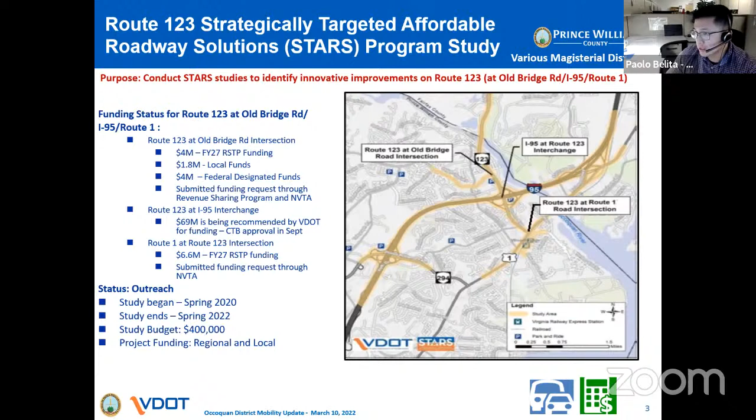With regards to the Old Bridge Road at 123 improvements, I know there are a lot of questions. The exact design will be determined as we go into the design phase, but conceptually, the improvements look at an overpass from northbound 123 to westbound Old Bridge Road. The exact improvements and impact will be determined during the design phase.

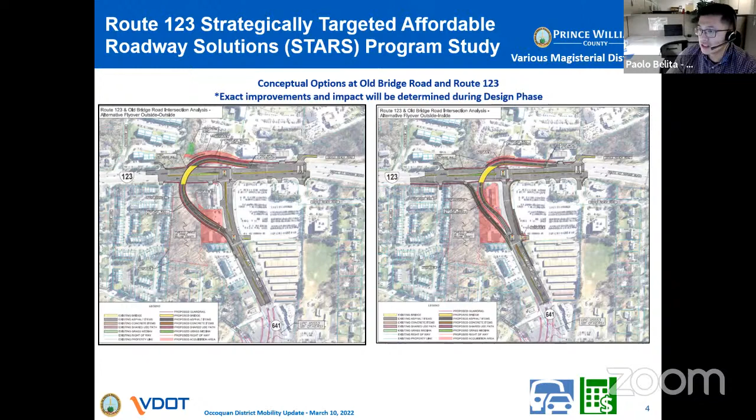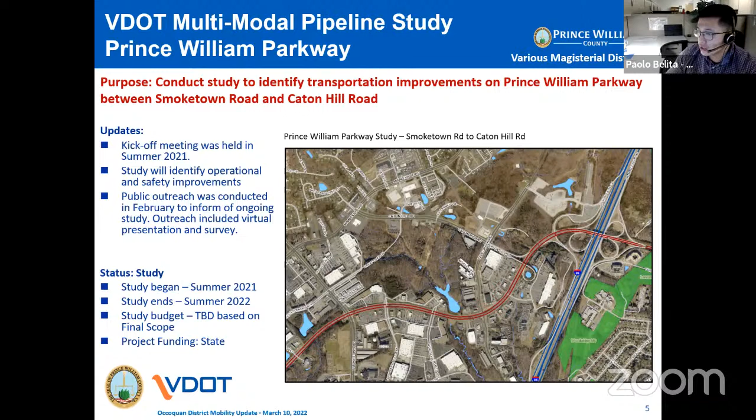Another study we're very excited about is VDOT's multimodal pipeline study. It's similar to SMART Scale, but looks at corridor-wide improvements. VDOT is doing a study on Prince William Parkway between Smoketown Road and Caton Hill Road, looking at intersection improvements and bike-ped safety improvements as well. This is ongoing, but ideally VDOT is looking for improvements that add additional turn lanes, crosswalks, innovative intersections such as through-cut intersections, and intersection improvements that really improve throughput along the corridor. This should be completed sometime this summer.

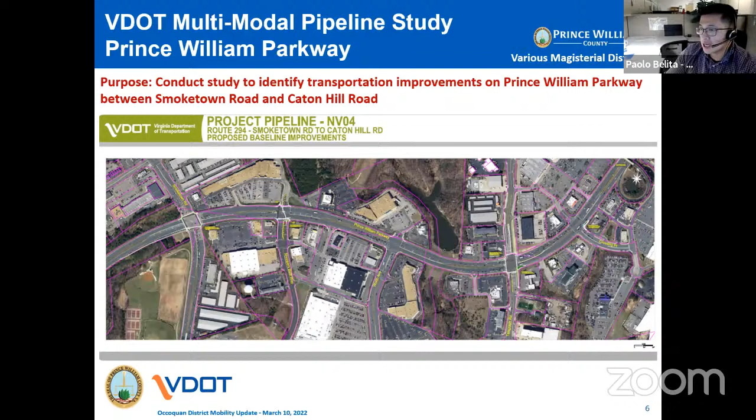Going into active projects, the first is the Old Bridge Road, Occoquan Road intersection improvements. This realigns the Old Bridge Road, Occoquan intersection itself. We had a joint in-person and virtual public hearing held last month at Occoquan Elementary School, with a good turnout - very exciting. Project design began in June 2020 and will be completed later this year. Construction is anticipated to begin in early '24 with completion in early '26. It is fully funded with VDOT SMART Scale funds.

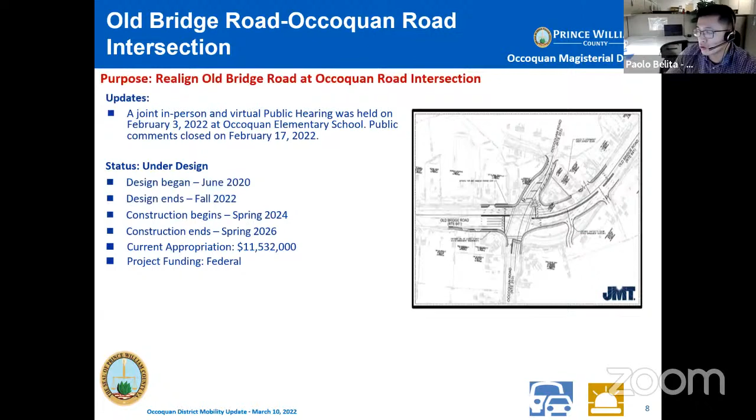As you can see with the schedule, a federal project does take a little bit longer - there are different requirements compared to a locally funded project. Here's a concept shared at last month's virtual information meeting, showing the realignment along with the bike-ped facilities and the intersection improvements itself.

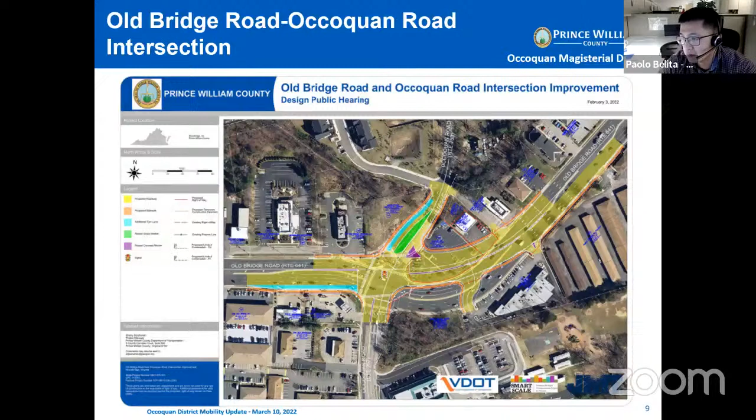Next project is the Summit School Road and Telegraph Road improvements. The project extends Summit School Road, where it currently terminates at Kinnicutt Drive, and ties it into Telegraph Road. It also includes widening Telegraph Road from Caton Hill Road to Prince William Parkway from 2 to 4 lanes. Project design began in 2019 and was completed last summer. We anticipate beginning construction late this year, with the project completed in early 2024. It shows $11 million on the screen, but NVTA has fully funded the project at a total of $35 million, so we're very excited to move forward.

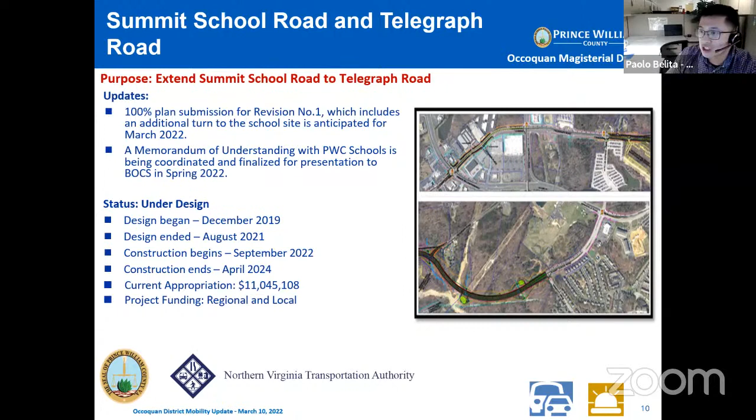Just another conceptual rendering of the project. It includes a trail on the east side, a sidewalk on the west side throughout the length of the project, and improvements to the future school at this location. We're continuing to work with our public school system on implementing improvements that will help circulation within their facilities as well.

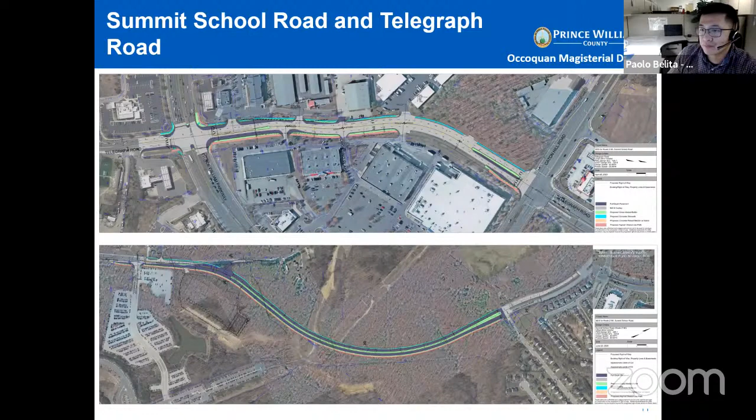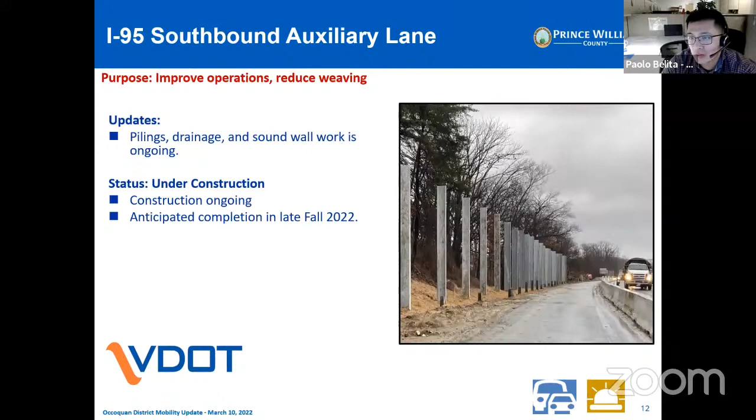Next project isn't a county project, but it is a very important project in the Occoquan District. This is VDOT's I-95 southbound auxiliary lane project. It extends the on-ramp from 123 onto southbound 95 to tie into the on-ramp from 95 to Prince William Parkway. There are a lot of weaving issues, and the intent is to minimize conflicts and improve throughput along this section of 95. This project is fully funded at approximately $28 million and will be completed by the end of the year.

One upcoming project we wanted to highlight is the Prince William Parkway at Old Bridge Road intersection improvements project. It realigns Prince William Parkway at Old Bridge Road to be continuous. The project was initially funded with Smart Scale for FY26 and 27, but working with VDOT we were able to accelerate the funds and plan to begin design sometime this year. This is a very exciting project. Currently, going from 95 towards Manassas on Prince William Parkway, you have a dual left turn, and going the other direction a single off-ramp to stay on the parkway. This project improves throughput by realigning the parkway as the major through corridor at this intersection.

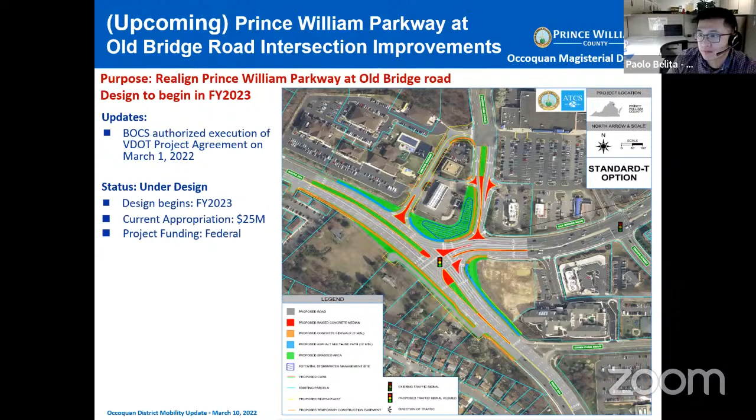Other improvement projects in the Occoquan District include two pedestrian improvement projects. One is on Old Bridge Road between Tackett's Mill and Minnieville Road, which is under construction and should be completed soon. Another is on Old Bridge Road between Oakwood and Forest Hills, a grant project currently under design, to be completed late this year or early 2023.

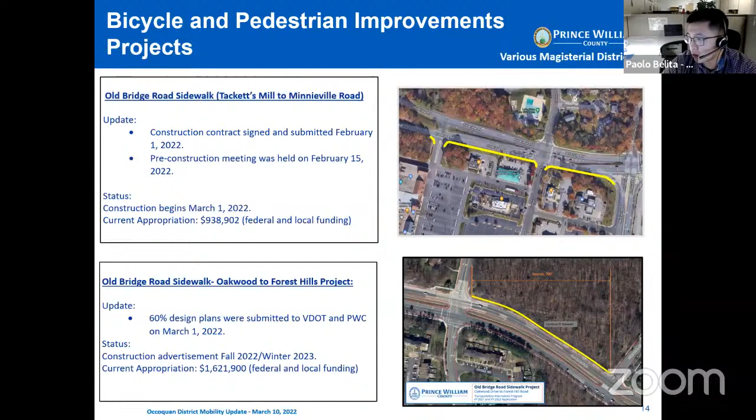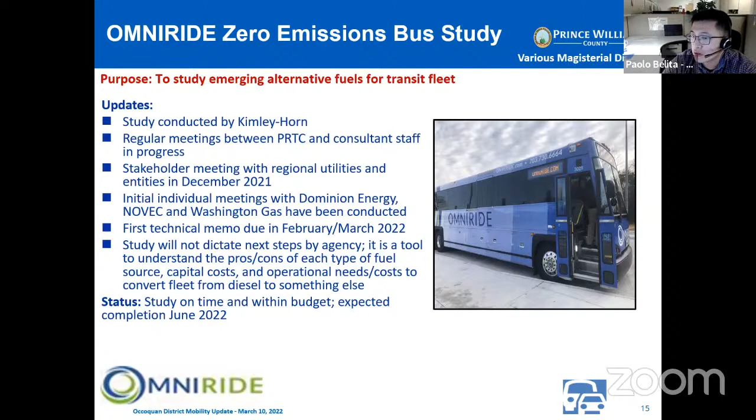Switching to some initiatives from OmniRide, PRTC, and our transit partners: they're conducting a zero emissions bus study to examine emerging technology related to alternative fuels for the transit fleet. The study is ongoing and will be completed this summer. It won't necessarily dictate next steps, but will look at the pros and cons of different fleet options, from diesel to newer technologies. This is very exciting and underway.

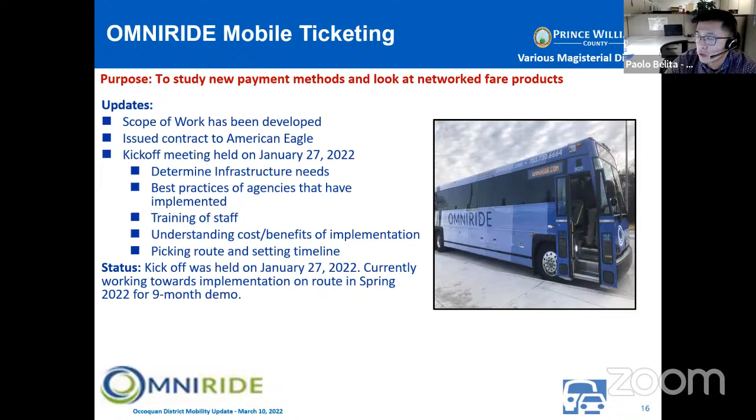OmniRide is also looking at a mobile ticketing study to explore new payment methods for their networked fare products, including best practices and staff training. The study is ongoing, and they plan to implement a 9-month demo starting this spring, looking at alternate ways to accept payments. This is another very exciting study.

In addition, OmniRide has various mobility councils to give a forum to the public and share information. They have the Vanpool Council, the Employer Council, and the Hispanic Council, all active and meeting over the past several months.

With that, I will turn to questions and hand it back over to Supervisor Boddye.

Rick Canizales, Director of Transportation: All the projects that Paolo described include pedestrian and bicycle facilities. So all the major road improvements discussed this evening, not just the standalone bike and pedestrian projects, but all the projects include both a pedestrian and multi-use trail as well as a sidewalk on the opposite side. I wanted to make everybody aware that as we're planning facilities nowadays, we continue to think comprehensively and want to make sure we're multimodal, going back to mobility rather than just transportation.

Thank you. Sure, absolutely. And if anyone has driven by Old Bridge and Minnieville, they're literally digging up right now along Tackett's Mill. I am assuming, Paolo and Rick, that's the project you were just talking about with the sidewalks. Correct, yes—underway and should be completed in the very near future.

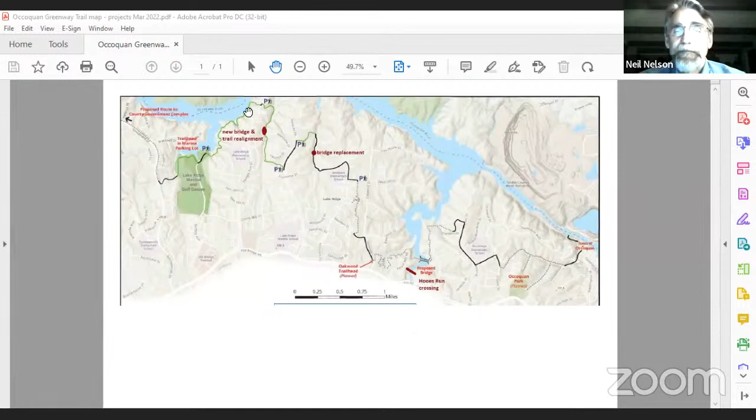If you've been out on the trail lately, you won't have seen any major new construction, but it is coming, and we'll go through the sites here. On the upper left, we're talking about segment 3, the new bridge and trail realignment on Hedges Run, the stream.

The solicitation for bids on that bridge construction should be out. The Parks Department is planning for the bid period to close on April 8. Since we last had a meeting like this, they got the bridge construction permit approved and the site construction plan approved. I haven't got confirmation the solicitation is out, but it's supposed to be. It was very close just a few days ago.

So they'll be looking at the bids in April, and tentatively planning for construction over the summer months, from the May to September period, if things go as scheduled. And concurrently - that's the bridge construction itself.

Concurrently, they will hire another contractor for a smaller project, the trail realignment. In that section, they're lifting the trail up away from the stream bank and putting it at higher ground, and aligning it to meet the new bridge. Doing that will eliminate the need for 3 smaller bridges down on the old trail, 3 stream crossings, in an area subject to erosion and flooding.